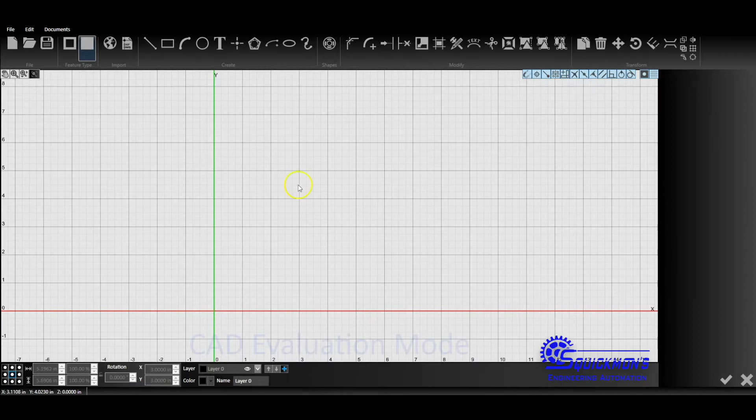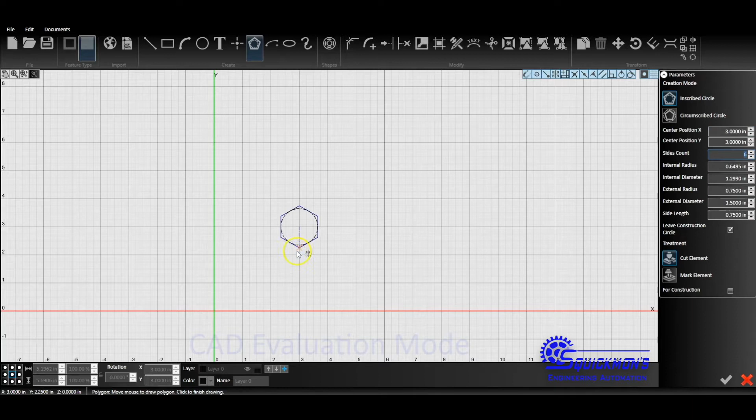We're going to start by selecting our polygon feature up here, and notice it'll show us the hotkey, Shift P. Our polygon feature is selected, and we're going to make a 6-inch polygon. I'm going to count up from this red line: 1, 2, 3, that would be half of the size, and I'm going to drag this out right about there. So that's 6 inches from point to point. Click, then enter, then escape to get out of the polygon command.

Now I'm going to make the circle bolt holes. I'll click the circle, or I could use the C feature which would bring me straight to the circle. I'm going to go about 3 blocks down from this point, which is 3/4 of an inch in. All this is relative to what you're working with. So if you knew your hole pattern was circular and 5 inches on center, or 5.5 on center, you could figure out exactly where that is and make a circle from here, tab and say this is going to be 5 on center.

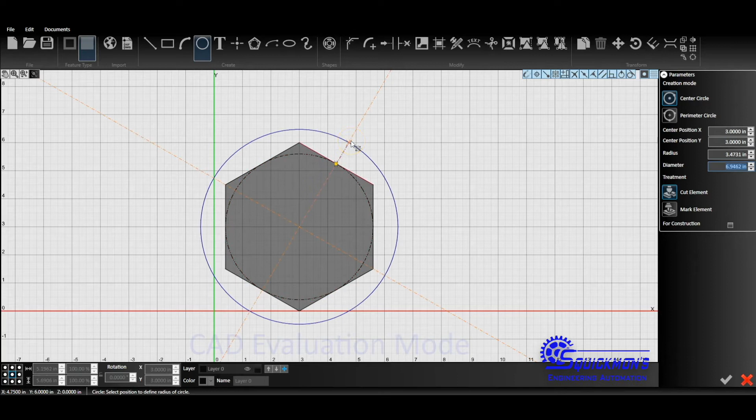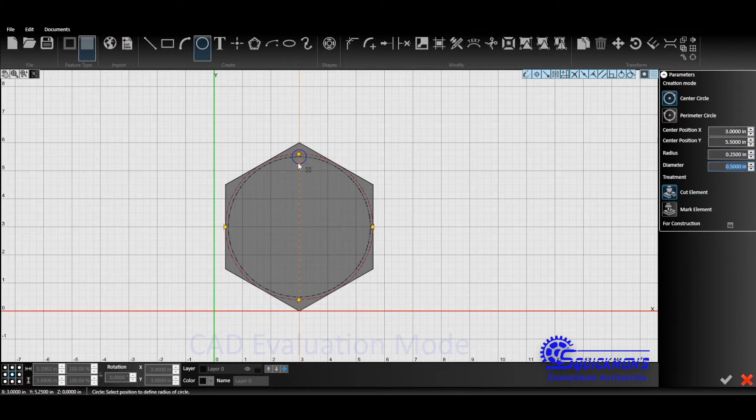So let's go back, Control Z. Let's do this for construction - we just want a construction line. Tab and 5. Okay, so there's our construction line. It's not going to affect my print at all, it's not going to try to cut on that line, but it allows me to snap to it for the center points of my circle, or at least the first one. So I'm going to click the circle, snap right there to the center, go D, then 0.5, enter. So now we have a half-inch circle.

I'm going to select that circle and do a polar array. Now I'm just going to drag the center of that polar array right down to there. Once that's done, now I'm going to designate how many - I want to do 6 of these. It'll put them all at the points of my hexagon. And then I'm going to check that off.

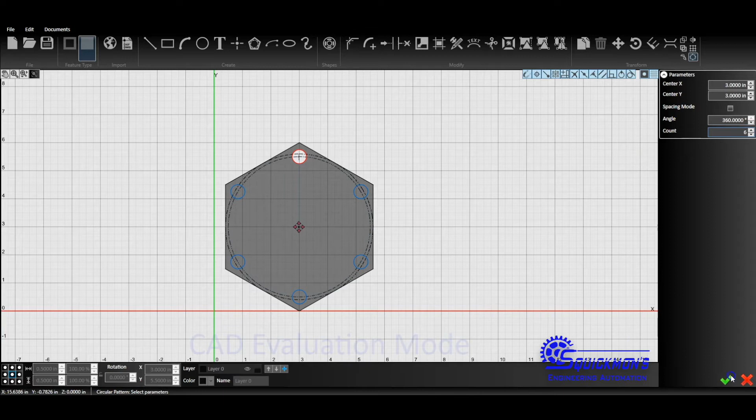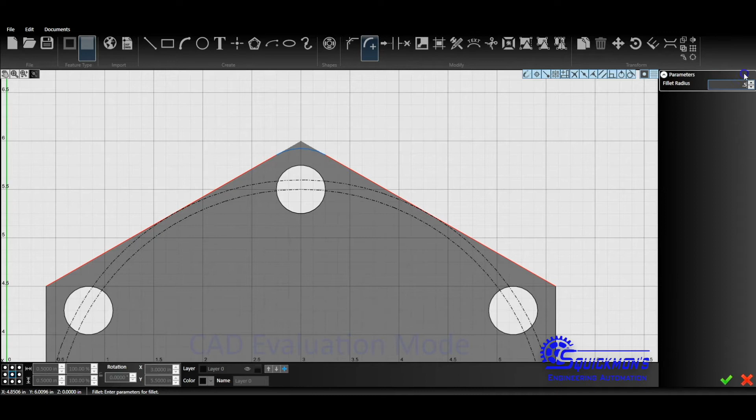Now I have that, and if I want to fillet these edges, I'll go up to this fillet command, or I can click F. With F selected, I can click one of these lines and one of these lines, and you'll notice it's going to round this off. I have it set to a 0.1-inch radius - I'm going to make that a little bigger, so 0.5, enter. Zoom out.

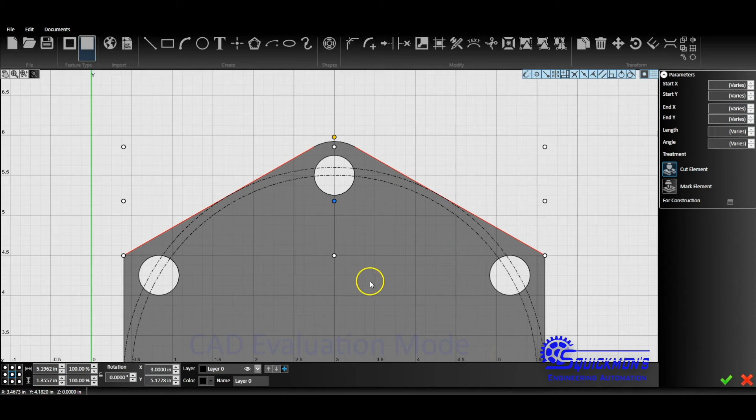Okay, I'm going to zoom back out here, and now I'm going to click the F command and do the same thing to all of these. My computer's a little laggy right now, so I'm going to go down and select this guy. Click enter. Escape.

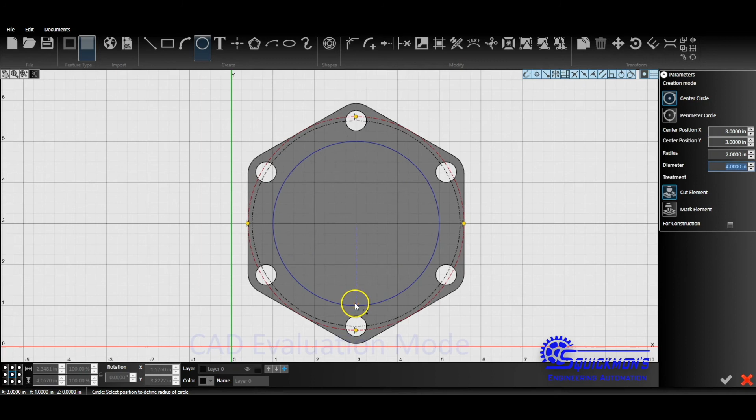As you can see, we just made that hexagon flange. I can send it over to CAM, and it automatically does our cuts, our tool paths. We can also say this is going around a big pipe, and that pipe is, say, 4 inches. Now we send that over, and now we have this flange where that might be where two pipelines come together and get bolted. There might be a lot more bolts - it's all depending on the tension you need to withstand. You could calculate the tensile strength across each of those bolts if you were doing some engineering practice, but this is just one application of how this could be used.